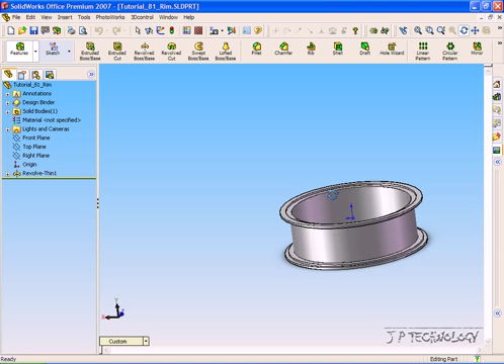This is tutorial number 84, and it covers how to make the dish in your rim within SOLIDWORKS. Now to start off, let's open up the 81 rim that you've made yourself or that I've included on the DVD. What we're going to do with this rim is reverse engineer the dish coming out of it like we did for the tire.

So to do this, let's open up the 81 rim, click File, Save As a copy - I've already done it, we have the tutorial 84 dish. Just save it as a copy. Once you've done that, close the 81 rim and open up the 84 dish.

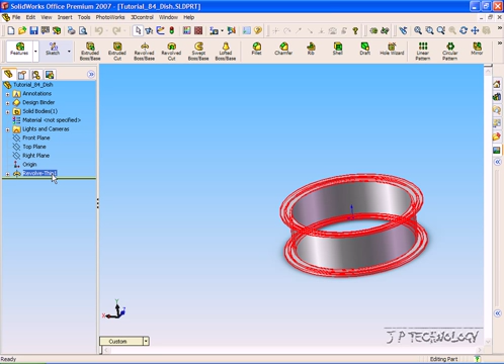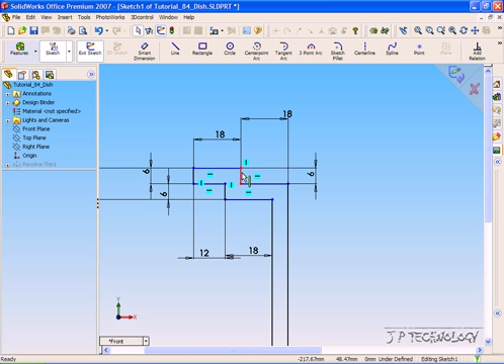Like with the tire, we're going to reverse engineer from the original sketch. So let's click Edit Sketch, click the front view, and with this, it's totally up to you - you can make whatever you want. The only parameters or dimensions you really have to follow is that this little corner is going to be where the dish begins, and it has to end up in line with this axis here. So this is a free-for-all, it's up to you, be creative, make whatever you want. I'm just going to do a basic one, a simple one.

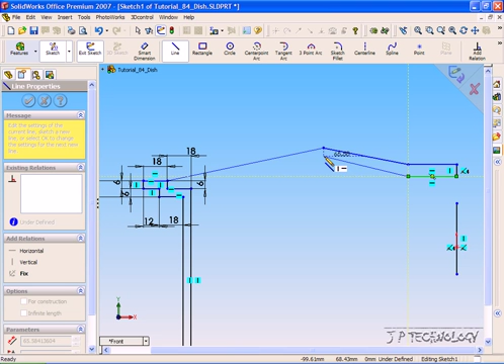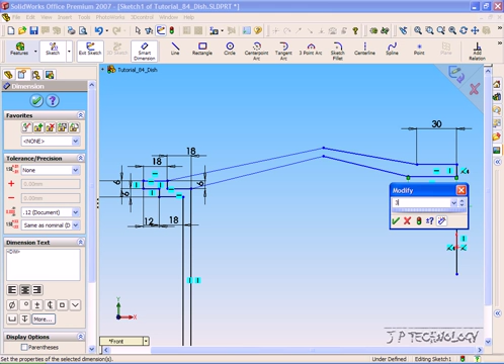Make sure that you see that blue dotted line there. This dimension here is going to be the radius of where you're going to be bolting your rim to your hub or rotor. So you can make it whatever size your hub or rotor is going to be, that's what you'd make it. This tutorial, I'm just going to make this 30 with the radius, and same with the bottom. With the bottom, it doesn't really matter - you're not really going to see it, so it doesn't have to be perfect or exact.

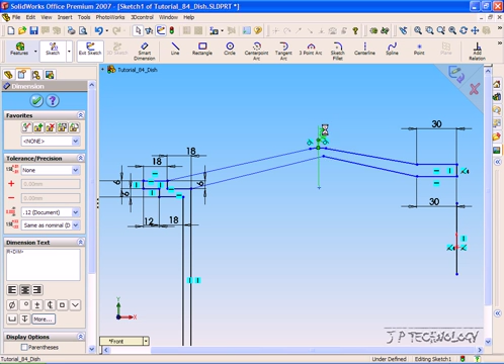And I'm going to add a little bit of a curve here. I'm going to make this 30 - actually, I'm going to make it a little bit more, let's make it 50.

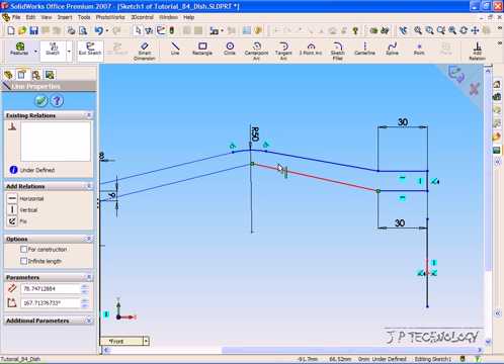Now, once you have everything in place, it doesn't really matter where you have this bottom line, it's up to you, you can play around with it. If you want to make it look nicer you can do it, but you're not going to really be seeing it. So once you have your dish, the basic outline, make sure it's touching these corners, comes out from there, and that this line here is in parallel with this axis.

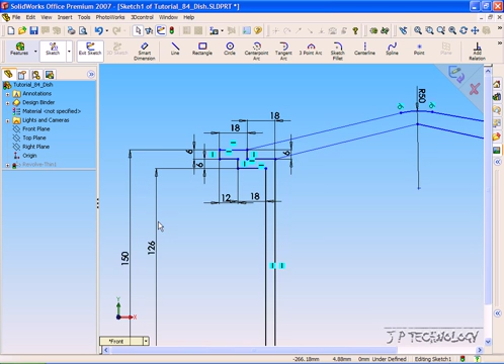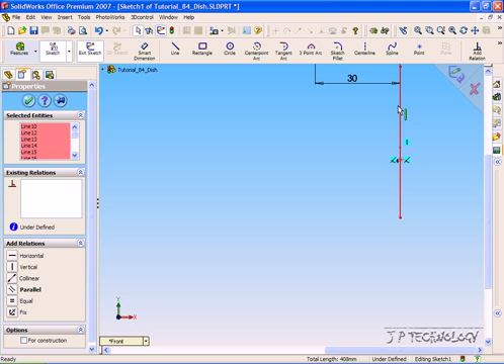Now we can go around and delete some lines. So let's select these lines here that we don't need - you can do it one by one, I'm selecting them all at once. And also delete this axis here. Click delete, yes to all. Now you're left with just the profile of your dish.

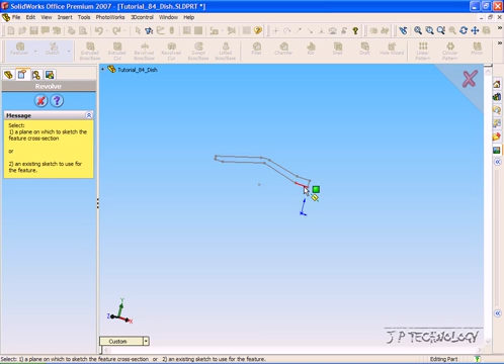Now click OK, you're going to have a problem - don't worry about it, click no. Close it, delete the revolve that we had before, and let's make a new one. We're going to revolve it around this line here, and you can see the preview. Click OK.

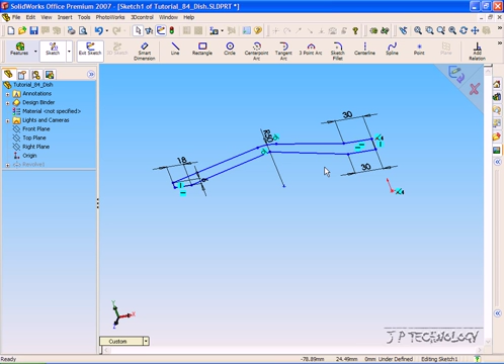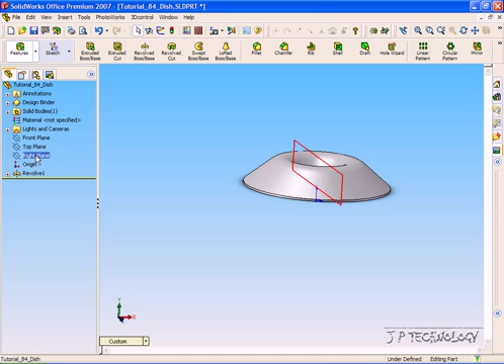And now you have just the basic dish from what we're going to use to cut out and make the rim, the total tire, and assembly from. Now, after you've made it, if you don't like it, all you have to do is right click, edit the sketch, and you can change some of the parameters. Say we want to drag this down, you can drag it up - let's drag this up just to show you an exaggerated example. Click OK, and now you can see that it changed the dish or the insert there. So you just toggle between the two and play around with it until you like what you're seeing.

So from this dish, we're going to be making the holes, the cutouts, and we'll be completing our tire and rim assembly. And that concludes our tutorial on how to make the dish for the rim within SOLIDWORKS.